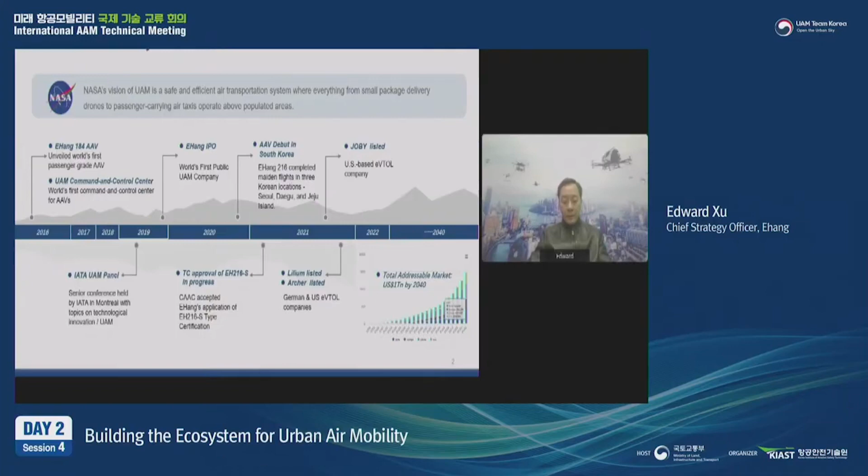With increasing enthusiasm from governments and investment institutions, we see the emergence of firms with various designs of aerial vehicles in recent years, including global aviation giants like Boeing and Airbus, as well as startup firms including Ehang, Joby, Volocopter, etc. While many of these designs are still in early stages, it brings great innovative ideas to the whole industry.

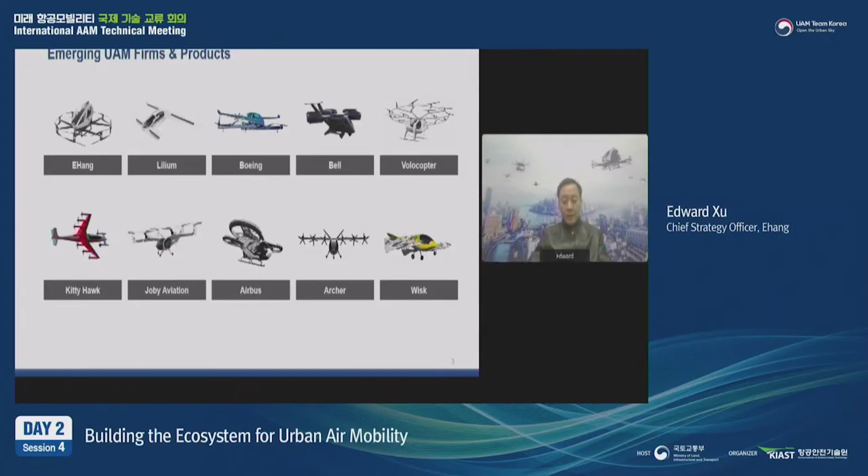Looking at the development of urban air mobility, we think it could be defined roughly in three levels. UAM version 1.0: urban air mobility conducted by conventional helicopters within cities, such as New York in the US and Rio in Brazil. With human pilots on board, there's a lack of a digital online platform to ensure high accuracy and safety.

For UAM version 2.0, it should be upgraded with both a digital platform and a new version of aerial vehicles, which are lighter and more eco-friendly, with lower emission and noise levels. However, a human pilot is still on board in this version.

For UAM version 3.0, which is the current model developed by Ehang, we emphasize the key features of full automation with computerized piloting, 5G online platform, point-to-point flight operation, and cluster management skills. From the perspective of safety, efficiency, and economic costs, we believe this should be the future of the industry.

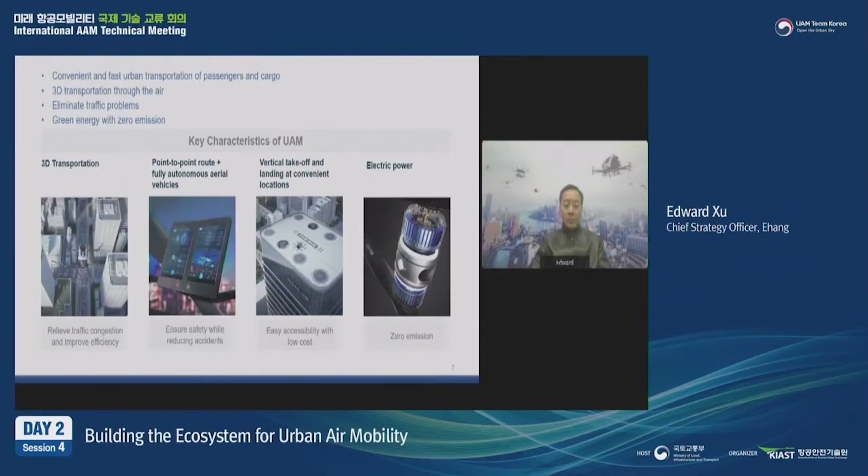Basically, it offers convenient, safe and fast urban transportation, and three-dimensional transportation through the air, eliminating traffic problems, with green energy and zero emission.

In defining the right model of urban air mobility, we think it should possess the following characteristics: first, 3D transportation to improve efficiency; two, point-to-point routes with autonomous flights to ensure safety; three, vertical takeoff and landing to improve convenience and flexibility; and fourth, electric power to eliminate carbon emissions.

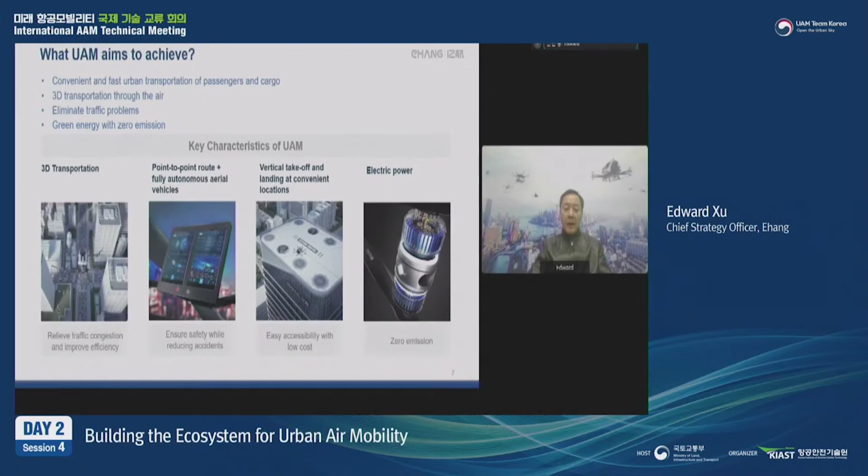Moreover, we need to build a whole ecosystem, including a centralized platform with distributed local command control centers to operate multiple AAVs in real time.

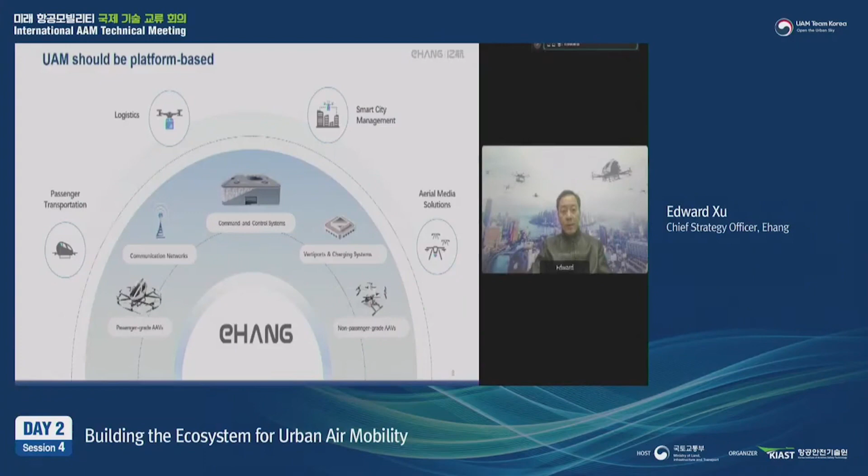We define the key elements of the UAM ecosystem as the following: one, autonomous aerial vehicles, or AAVs; two, command and control platform; three, regulatory bodies; fourth, infrastructure; and fifth, ATM and UTM synchronization. Next, I'm going to elaborate further on each element.

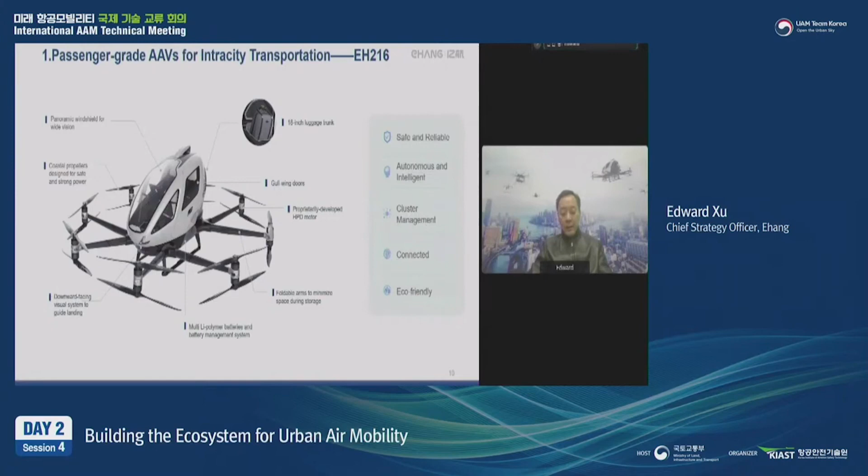For AAVs to be suitable for urban air mobility, they need to be safe and reliable, autonomous and intelligent, able to be controlled in clusters or groups, real-time network connected, and eco-friendly.

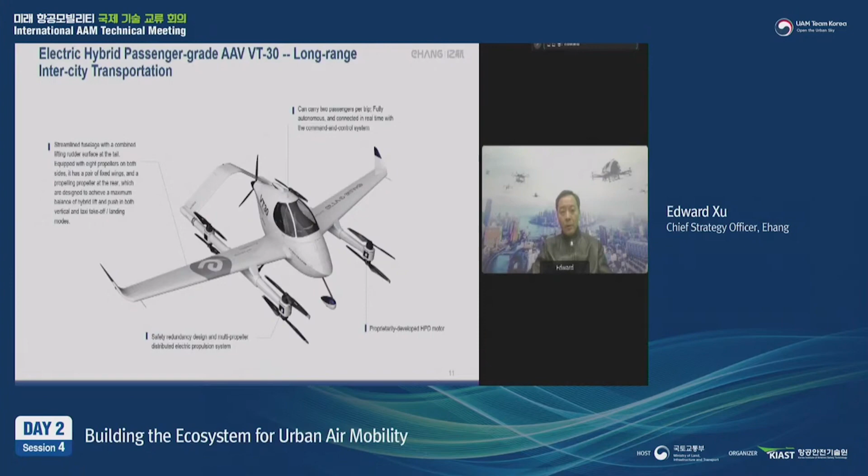For future commercial operations, we emphasize the convenience, safety, and the speed of power charging. Especially, we highlight the Smart Battery Management System, or BMS, to ensure safe and efficient use of energy. Next slide, please.

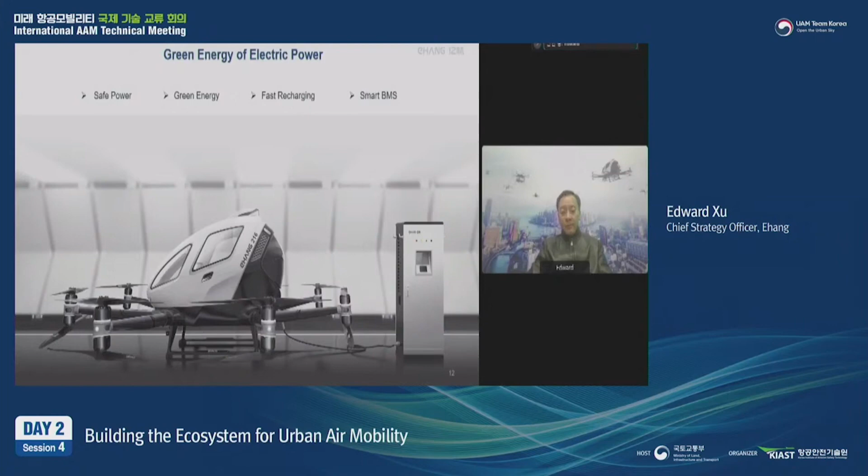For autonomous flight control, we emphasize the use of point-to-point route planning with the help of AI technologies to ensure the high accuracy of the flight, including takeoff, cruising, and landing. Relative to human pilots, we believe AAVs with auto-piloting functions can prove to be safer and more accurate. Next slide, please.

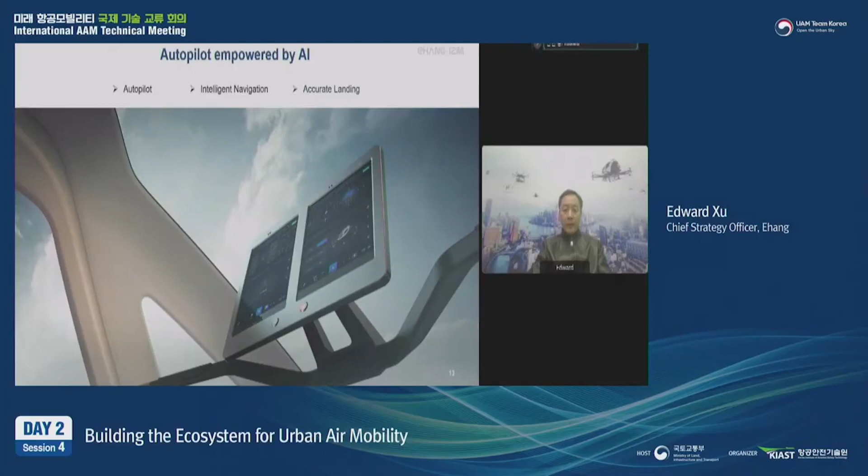From the government and regulatory perspectives, it requires a compilation of laws and rules to foster the healthy development of the UAM industry. Just like the invention of cars over 100 years ago, nobody had any sense of traffic laws at all. Since technology and innovations are always ahead of regulations, we expect the issuance of standards by relevant government bodies. It is great to see the new progress made by various government entities in recent years, including China, Korea, US, and Europe. We believe this progress will lead to the prosperity of the UAM industry in the next decades. The next slide, please.

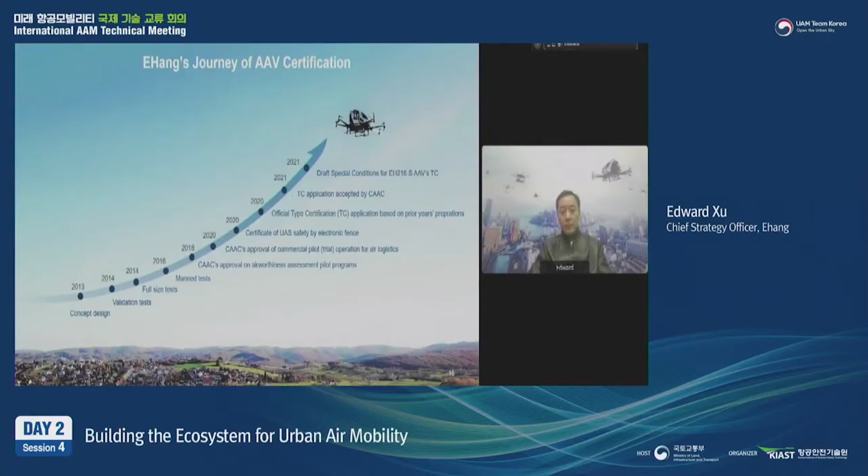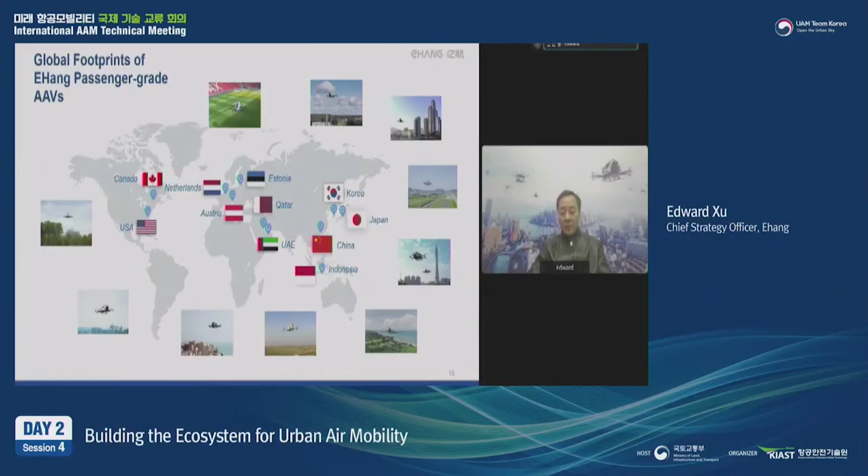Meanwhile, we have also been working closely with various regulatory bodies in the world to obtain flight permits, including the US, Austria, Canada, Korea, Japan, and Indonesia, etc. The next slide, please. So far, EHang's global footprint covers 10 countries and over 40 cities, thanks to the support and acceptance by local regulators and government bodies. The next slide, please.

As we highlighted earlier, infrastructure constitutes a key element of the UAM ecosystem. We envision the emergence of more accessible landing pads, charging centers, AAV terminals, and upgraded 5G and 6G networks among the cities in the future to facilitate the proper operation of UAM services. The next slide, please.

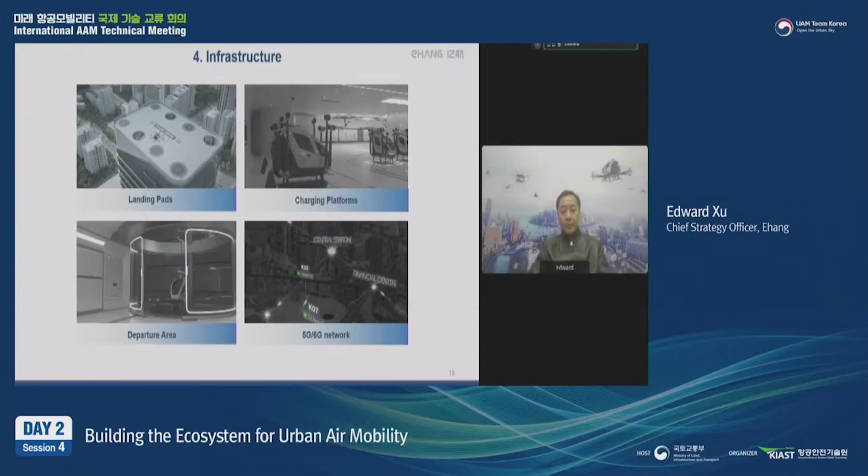And finally, we highlight the importance of the synchronization of ATM and UTM, especially with a focus on low-altitude airspace management. Similar to ICAO's airspace classification, we believe the low-altitude airspace below 300 meters needs to be separated carefully for the use of AAVs in the future. While this level has minimum effect on existing airspace for both civil and general aviation, UAM services require much higher frequencies and densities of AAV flights within the cities, which need to be managed in separations. This further supports our view that point-to-point autonomous flight operations are necessary to ensure high accuracy and safety. The next slide, please.

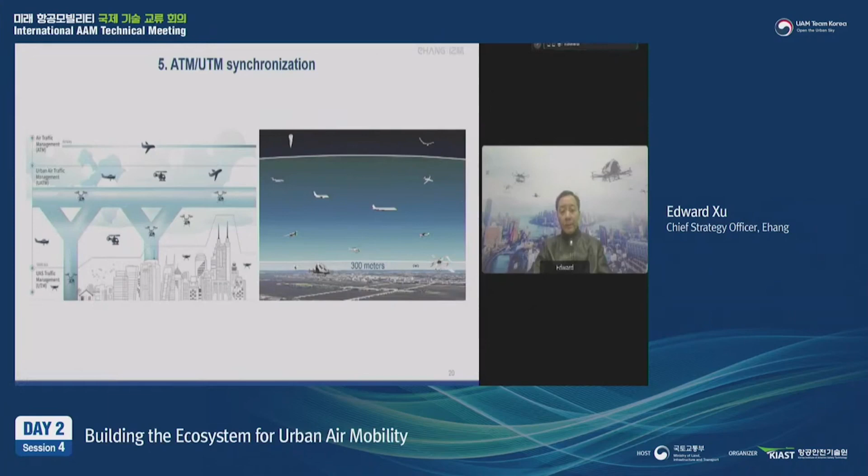And finally, I'd like to share with you some real-life use cases of EHang's AAVs. First, as you can see, this is passenger transportation. We did over 20,000 manned flight tests all over the world, which proved to be highly reliable and safe. We made our maiden flight in 3 Korean locations, which was well accepted by the local people. And next slide, please.

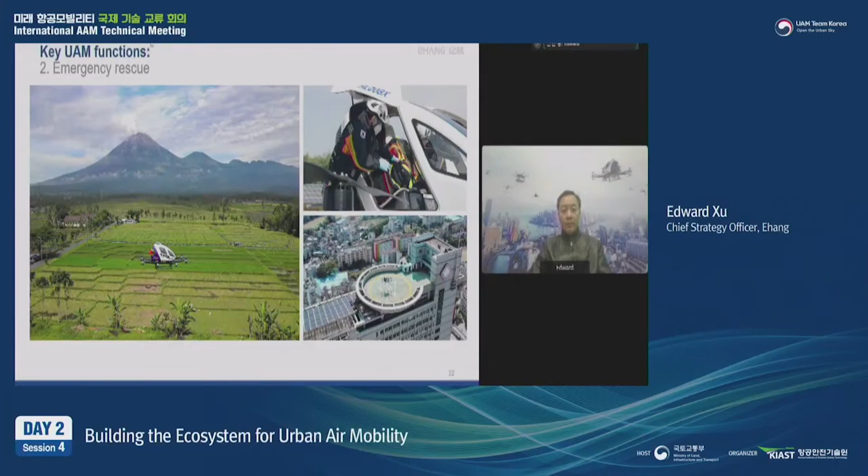And here is a picture of the emergency rescue use case we made in Korea as well. During the COVID-19 outbreak in China, we sent our EHang 216 AAV for rescue and also the transportation of medical supplies and patients. And we also have the EHang 216 firefighting version, which is designed for high-rise building firefighting and can be put into use for firefighting emergencies as well. And next slide, please.

Right now, we see very popular use of aerial sightseeing because of this autonomous flight. Passengers can enjoy the scenery from a different angle in the sky, which is highly popular in many Chinese cities nowadays. And the next slide, please.

Especially, we launched a 100 route initiative in 2021 in China. We established AAV routes in China's Guangdong-Hong Kong-Macao Greater Bay Area to test the operational model for UAM. So far, we have made good progress under the guidance of CAAC. And in the future, we look forward to sharing with you the results of our plan implementation.

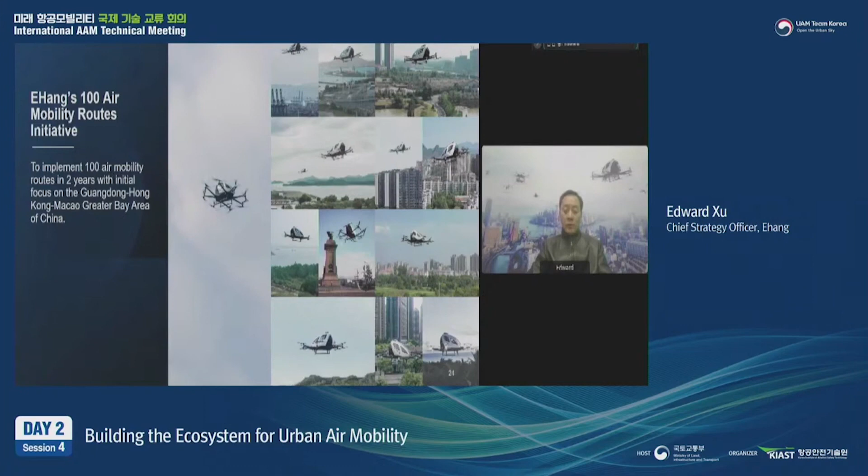And finally, to conclude my presentation, I'd like to share with you a video of our AAV flights in recent years. I believe the UAM future is now. Please play the video. Thank you.